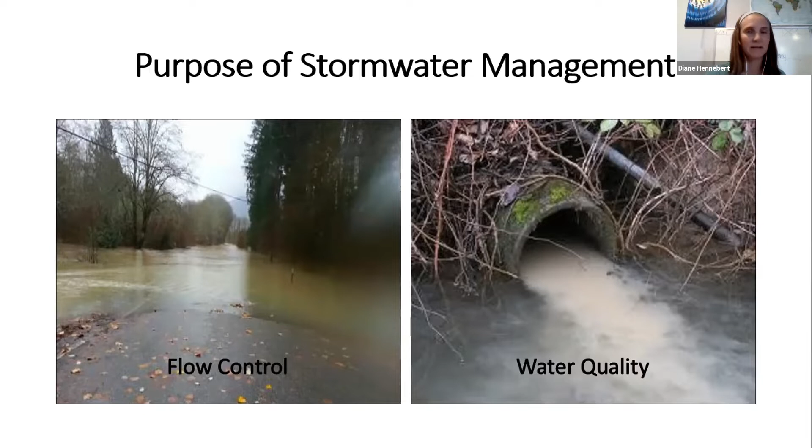A lot of these regulations come from the top. The Cuyahoga River caught on fire because it was so polluted, and that brought up a lot of public discussion and started the significant change that came with the Clean Water Act of 1972, as the government started to realize the importance of limiting dumping into our water bodies.

So the Clean Water Act came down through the EPA, and part of that was the National Pollutant Discharge Elimination System, which is kind of the second level down here, was part of that mandate. And here in Washington State, the NPDES program has been handed to the Department of Ecology for permitting. So they have a wide variety of permits where they limit what is released into our waterways.

Some of them in the private sector, like the industrial stormwater permit for industrial facilities, the boatyard permit, the sand and gravel, construction. And then there's also the utility-based permits. So the water treatment plant for Anacortes has its own NPDES permit, and so does our wastewater treatment plant. I'm here because my job is to oversee our municipal stormwater permit.

A lot of the local requirements that you have are a result of this NPDES program. We have requirements for our stormwater programs to ensure what's going in our neighborhoods is protecting water quality. And maintenance of privately owned stormwater facilities comes in, that bottom row is all of our minimum requirements for our permits, and it comes in under controlling runoff from developments and operations and maintenance.

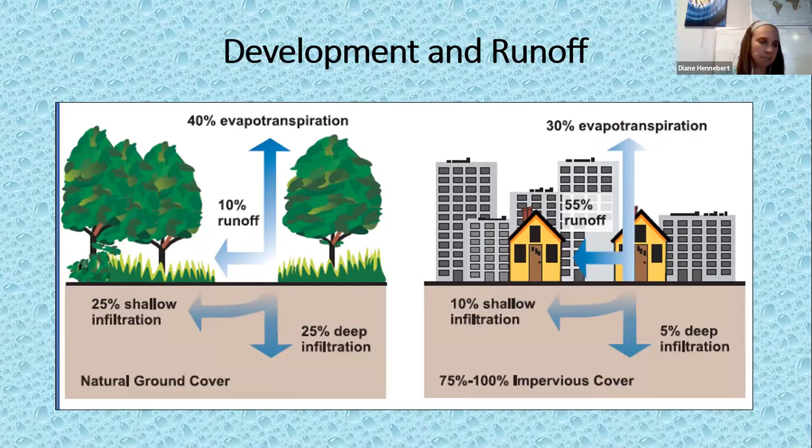So some of the basic components of a stormwater system I'll go over now, and then Reed will talk in a little bit more depth about these systems and how to maintain them. But your stormwater system, it starts with the downspouts from buildings and the catch basins in the street, and it ends in our local waterways. We have all these facilities to move the water, and sometimes it then goes through a stormwater facility along the way, like a detention pond or a vault or some kind of low impact development facility.

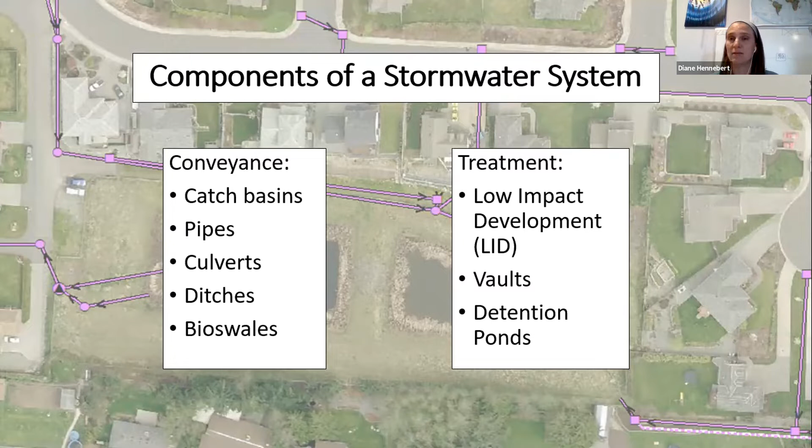So here's an aerial view of some of the typical stormwater facilities in Anacortes. This is part of our GIS mapping system. And you can see all of the little pink squares are catch basins in our roads. And then the purple lines are the pipes, and they usually have a directional arrow to show which way the water is flowing. So you can see where it collects on our roadways, and then a lot of it goes, the part that looks like a little tail is a bioswale, and I'll talk about those in a minute. And then the big part, big orange part, is a pond.

So the water goes into the stormwater pond, and then it collects out and runs to that blue line where it's discharged. And that blue line is the Ace of Hearts Creek. So everything that's coming off these roadways goes into Ace of Hearts Creek and then out to Fidalgo Bay. And that's why, in the stormwater world, we really try to emphasize only rain down the drain, because everything that goes into these catch basins is going to our waterways. It does not go to the wastewater treatment plant.

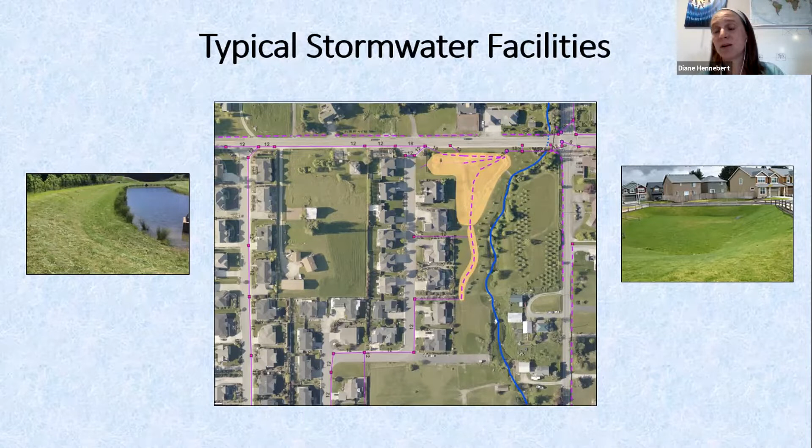So the first piece we'll talk about is a catch basin, or oftentimes called a storm drain. It's typically the first place that stormwater enters. It's an underground structure that collects the runoff off our roads and parking lots. And it allows the water to slow down a little bit, some of the dirt and sediment and trash to settle out. A well-maintained catch basin will help improve water quality.

Here in the drawing, we have what we call a type 1 catch basin. A type 2 is generally larger and circular, and we usually refer to those as manholes, but they function pretty much the same.

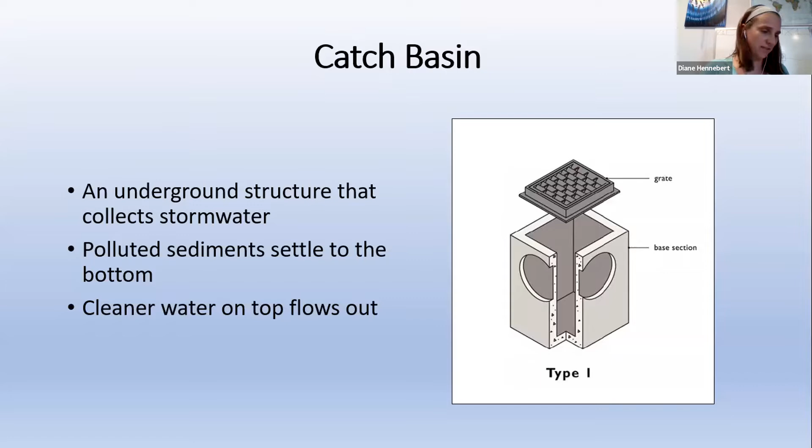So in neighborhood developments, stormwater often goes to a detention pond. They're engineered and constructed when the development is being built, and they're there due to the increase of the hard surfaces, the roofs, the roads, the sidewalks that are replacing the natural environment, and allow the greater development, allows them to capture the water and then slowly release it into the storm system.

In newer developments, often pond sizes are decreasing, not because there's less rainwater, but because there typically are a lot more low impact development features being put in overall, whether it's rain gardens for the houses, so everything that comes off the roof is being infiltrated on site instead of going to the storm pond, or permeable pavement. There are a lot of different options.

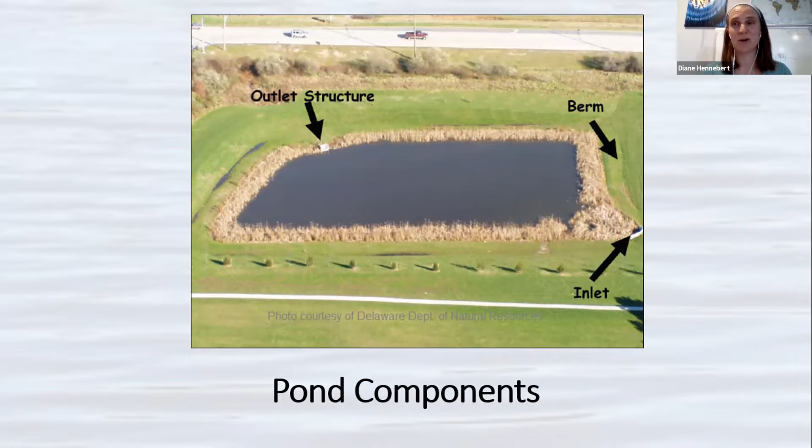So basic pond components, I'll go through and then talk about the difference between a wet pond and a dry pond. The big ones with the pond: the inlet where the water comes in, the outlet where the water goes out, and the berm, which is the wall that holds everything in place.

Wet ponds are designed to have water year round. They're usually lined with clay or plastic so that the water doesn't all infiltrate into the ground, and you can keep that year-round pool. They work because the water comes in and slows down, and the pollutants have a chance to settle out to the bottom. There can be some uptake by vegetation in and around the pond that will help capture some of that, and the rest resides in the sediments at the bottom. So periodically, you need to clean out the sediment out of the bottom of your pond to keep it functioning properly.

Dry ponds are not always recognizable as a stormwater facility. They usually just look like a big grassy field. They facilitate infiltration because they have no liner. So when the water comes in, it has a chance to soak into the ground. And a well-maintained pond typically should dry out within a week of a rain event. Now here in Western Washington, we get rain from early November until May, sometimes continuously. So it is possible to have a dry pond that spends a significant amount of the year with water in it. That does not necessarily mean that it's failing.

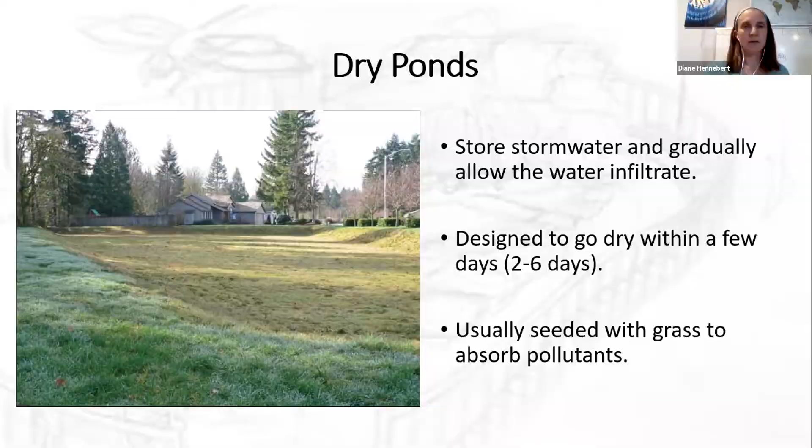So with your inlet and outlet pipes, they often have trash racks, which are the bars that you see in the picture here. The trash rack keeps debris and animals and children out of the storm pipes. And underneath the inlets, there's often riprap, which are those big rocky pieces underneath, usually about 12 inches in diameter. And those act as a splash pad to prevent erosion. So when the water comes pouring in during heavy rains, it's not sloughing away the soil, but the rocks can absorb that energy.

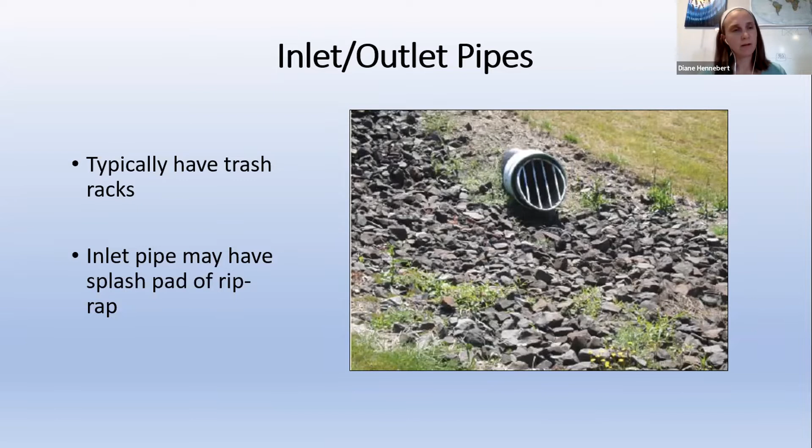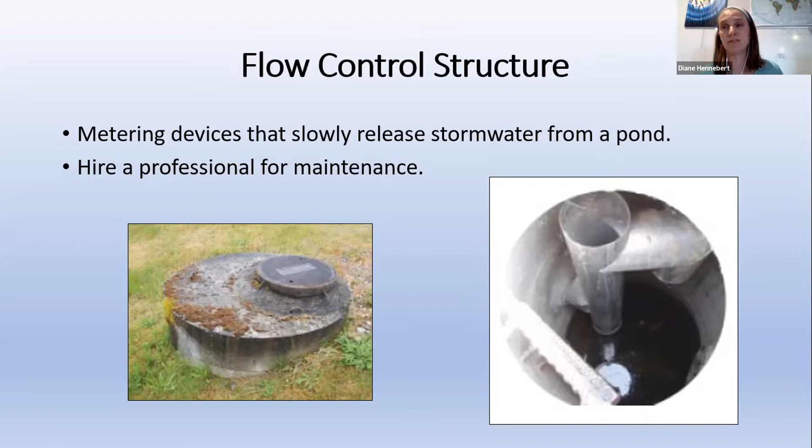Control spaces or control structures are confined spaces. So if you need to do some kind of maintenance to your control structure, you have to have someone who is confined space certified and trained for these kinds of repair and maintenance. I know the ladder may look really easy just to climb down in and take a look, but confined spaces can be deadly, and it's really, really important that you have someone with that certification going in there.

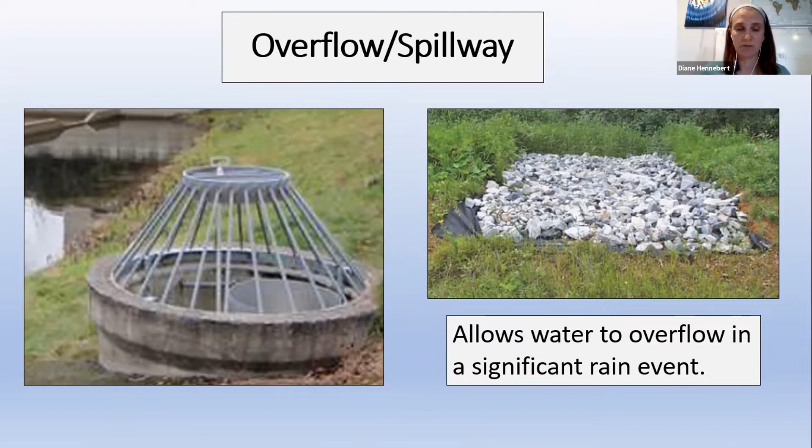And then there's the overflow and spillway. So this allows excess water to leave if, during a really heavy rainstorm, the pond gets full up to the brim. Sometimes it's a small cut on the top of the berm that's filled with riprap, like on the right, that allows water to spill out without eroding away the berm. And sometimes it's a beehive structure, like on the left, that can move water out of the pond really quickly to prevent overtopping.

Now, sometimes you want to keep an eye on these because sometimes rocks will come out of place, whether it be from erosion or local children. If I had something like this in my neighborhood growing up, I would have had a heyday building all kinds of new structures with it. So you do want to keep an eye and put them back together if they come apart.

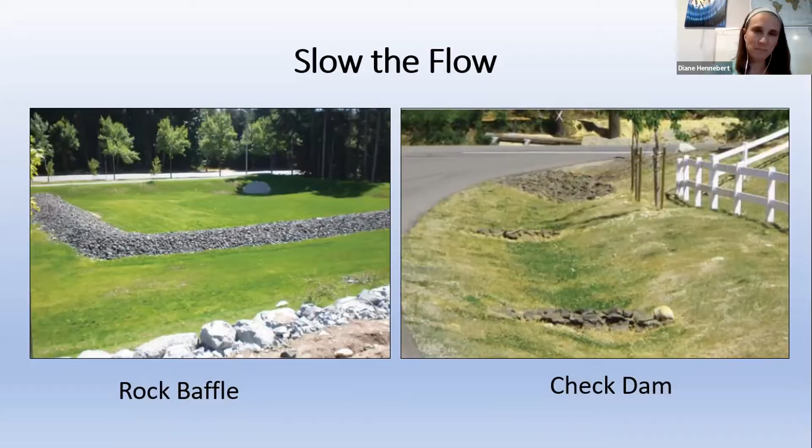And then there's berms and dams. The berms are the earthen walls of the stormwater pond, and they determine the capacity of the pond to hold water. And if an earthen wall is not possible for some reason, then sometimes concrete walls will be used for the perimeter of the pond. And a really important thing to note about your pond is that if your pond is above ground, not sunk down below the general elevation of the neighborhood, it's extra important to keep a close eye on the berms to make sure that you don't wind up flooding your neighborhood.

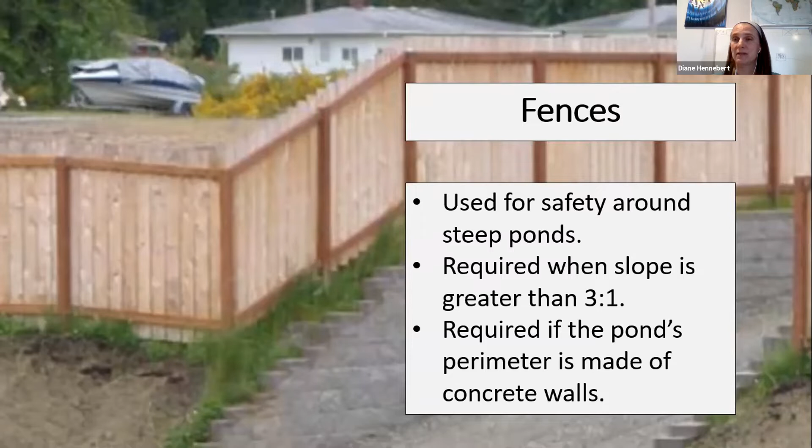And then fences. Most engineering standards require that stormwater ponds with steep slopes have a fence for public safety. Generally, if the slope is greater than 3:1, or if the perimeter is made of concrete walls, then you'll be required to have a fence around it and keep that fence in place.

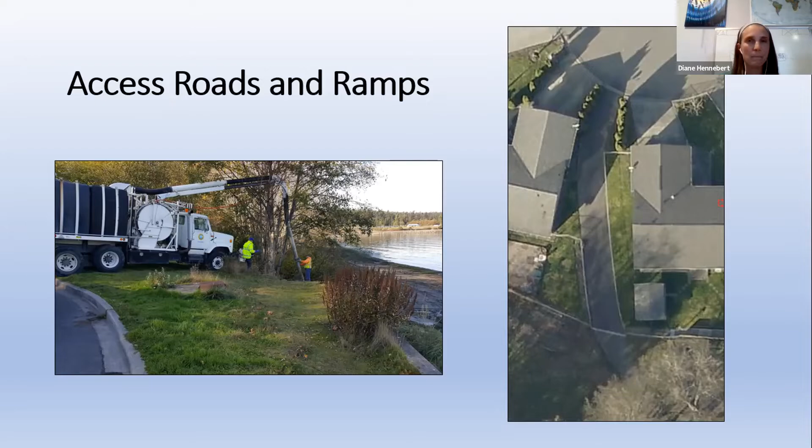So we've talked a lot about ponds, but bioswales are also really common in neighborhoods and commercial developments. They're wide, shallow, vegetated channels with really gentle slopes and flat bottoms. So you look at it and it looks like a grassy ditch, and to a degree, it's actually a fancy engineered grassy ditch. They usually have a real gentle slope so that the water goes really slowly. The grass is a really important piece. It helps to filter out pollution and suck up water for photosynthesis.

If it's designed properly and maintained, it can go a long ways to infiltrating and cleaning stormwater as it slowly makes its way through. And they can be anywhere in the stormwater system. You often see them alongside roads. They're really effective with capturing road runoff, but they can pop up all over the place.

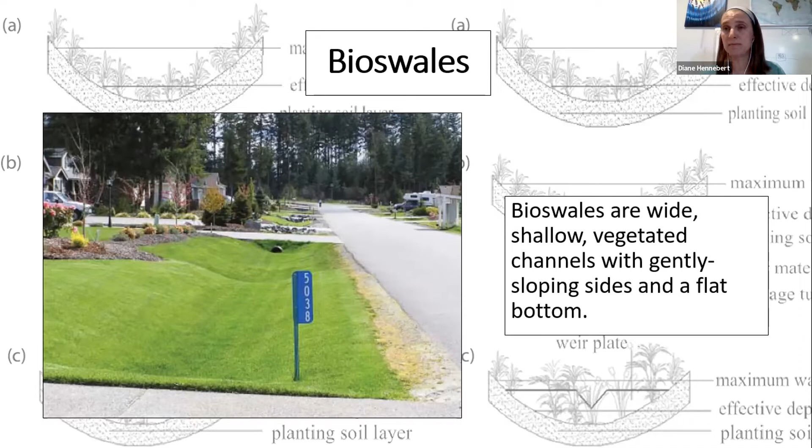Now, modifying swales can really reduce their ability to slow and treat rainwater, which then ultimately contributes to flooding. It might be tempting to fill it in and cover it up with rock for a parking pad like some other neighborhoods had, but then you lose all of that capacity for stormwater and all of that treatment. And the neighborhoods that have those gravel parking pads were probably permitted and built before your jurisdiction had an NPDES permit. And that's why they got away with it.

So the first thing you need to do is know your specific facility. Each pond is different depending on the location and the design and how much area it's draining. Most ponds are going to have the features that I've mentioned previously. Usually the developer will pass the plan sets on to the HOA, so you may already have those plans in your possession. If you don't have them, a combination of a little research and a little field work can be really helpful in determining what components you have and what you're responsible for maintaining. Or you can always hire a contractor to come in and figure it out and set up your maintenance plan for you.

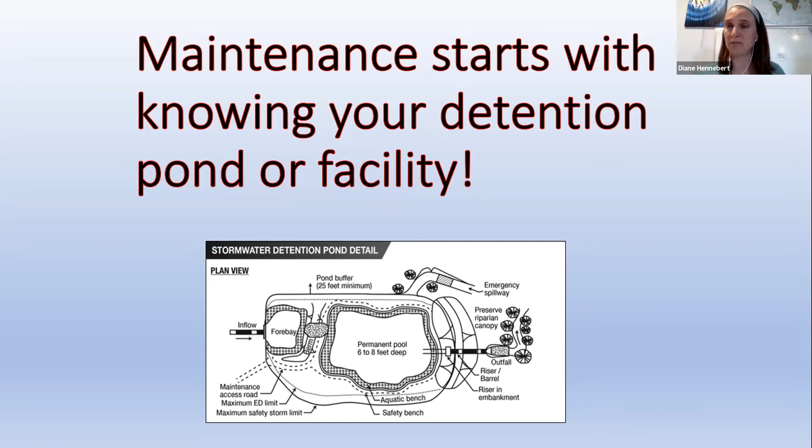So if you're looking for records, if you don't already have them in your possession from the developer, you can find different information in different places. Plat map for the area will generally tell you who's responsible for the facility, whether it's being signed over to the HOA or if the city has ownership or maintenance requirements for it. And that will always be site specific.

And then construction drawings will be useful for your pond specs for the elevation depth, the capacity, where the control structure is, what size the orifice is, all the things that you need to know to restore your pond. And an operations and maintenance guide is really helpful. The recommended maintenance is often included in the CC&Rs, but not always. And also you want to know about easements, which are usually on the plat map, but sometimes it's just a written description and some paperwork somewhere. That's really helpful for accessing your pond.

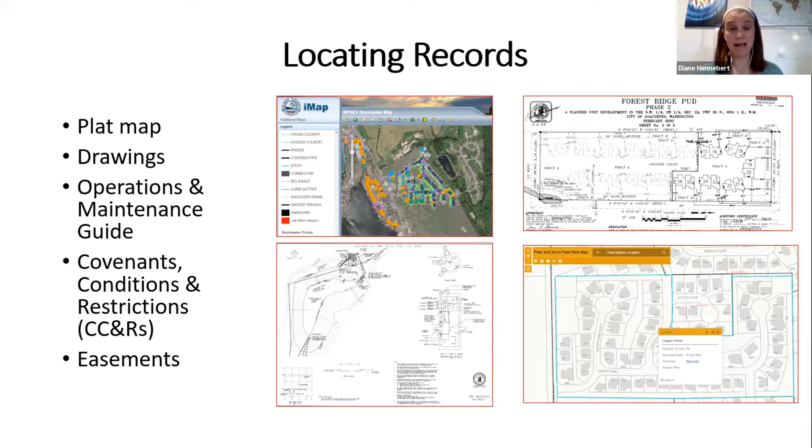So where do you find all of these documents? A great resource is the Skagit County IMAP. You can click on the parcel in IMAP, and then once you open up the parcel, you can click on Assessor Property Details. And then under the recorded documents, you can find all the recorded documents, which would include the plat map and easements and things along those lines. Or if you see an auditor's file number on something, you can go to the auditor's website and look up that file directly.

If you're having trouble with that, go into City Hall. I know Anacortes and I think most of the other jurisdictions we have on our website, you can access a lot of these records through our interactive map. But if you're having trouble, go in, they'll know what to look for and where to look for it and are happy to help you out, especially if you're interested in performing maintenance on your stormwater facilities.

Another useful thing is aerial photos. They don't always line up perfectly. So if you're using like the distance measurements on it, it may or may not line up quite right. It's not a substitute for a professional survey, but it can be really helpful to look at the aerial, especially if you have your site plans with you, because then you can see maybe where a catch basin might just have plants overgrowing it, and that's why you can't find it, or what might be going on with your facility. So those can be really helpful also.

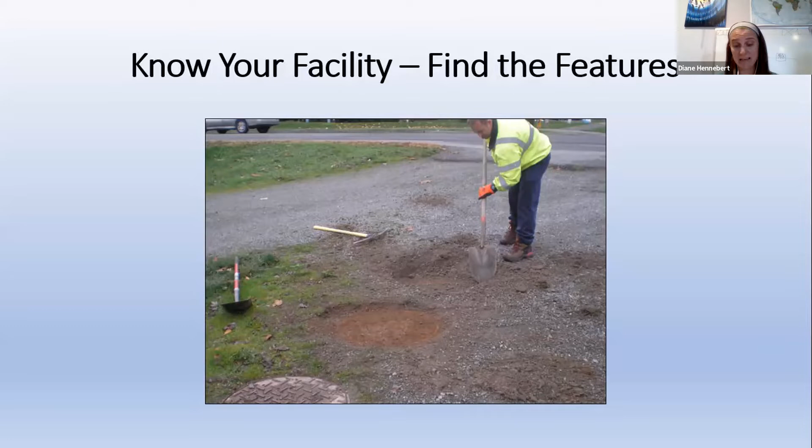I had one site that I was inspecting. It was a commercial facility outside of Skagit County, and the landscapers had been trimming the ivy really beautiful over their big, tall manhole. And so at first I couldn't find it, and I finally figured out it was hiding under this ivy, and we just actually needed to weed whack it all down to actually find it instead of turning it into yard art. And a metal detector can be handy for finding lids if you're really having a tough time.

So keeping an eye on your facility is a really great way to learn about it. Get a baseline during dry weather. What does it look like when it's been dry for a while? When we get a good rainstorm coming in, how fast does your pond fill up? The water that's coming in, what does it look like? Is it clear? Is it pretty murky looking? What kinds of things are you seeing floating in there? And then after the rainstorm ends, keep an eye on it.

How quickly do the pond levels drop? Is it flowing out at a normal rate? If it doesn't seem to be dropping at all, is there something blocking the outlet that's preventing the water from leaving? Or sometimes you get things blocking the orifice in the control structure that, again, will stop the water from leaving the pond. And so keeping an eye on it throughout the year will really give you an idea of when things start to change, or when a problem arises, you'll recognize that this is not how it's normally functioning during storms.

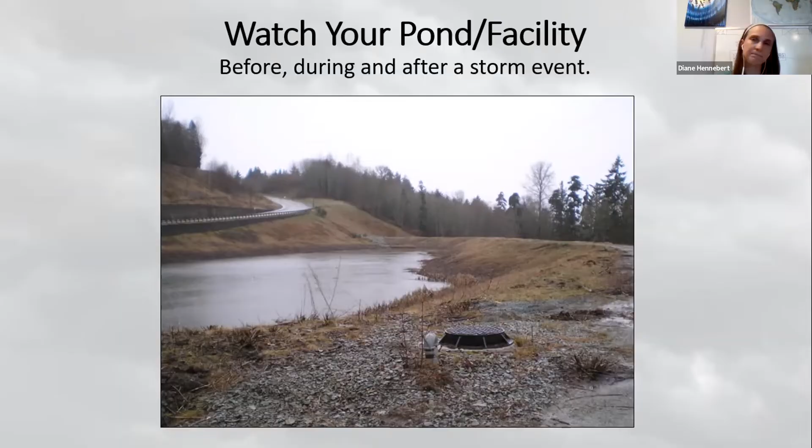So what if you don't have an operations and maintenance plan? There's nothing in the CC&Rs, you haven't found anything in any of the paperwork. You can look at the Department of Ecology's Stormwater Management Manual for Western Washington. Volume 5, Appendix 5A has maintenance standards. This was updated in 2019. If going through and trying to find that is frustrating, please give your local stormwater department a call, because I promise you, myself and all of my counterparts, we know exactly where to find these things, and we would be happy to send you a link just to that exact section that you need.

You can also hire people. There are a lot of contractors out there that are really knowledgeable and can help you, can come out and take a look at your site and tell you what you need to do and get you on a regular maintenance schedule.

If you do all these things, keep an eye on your pond, regularly inspect it, do maintenance, it can save you a lot of money in the long run. And I'll show you a couple of reasons why.

Trees. Mowing 1, 2, 3 times a year will keep your vegetation at an acceptable level and keeps trees from taking root in your berm, on your pond bottom. Alders and cottonwoods love the moist soils in our ponds, and they grow fast. They can reach 65 feet tall in 20 years, and then they break over. They're falling on people's fences. They're taking up capacity in your pond. And a tree clearing project is much more expensive than mowing once or twice a year to keep those little saplings down.

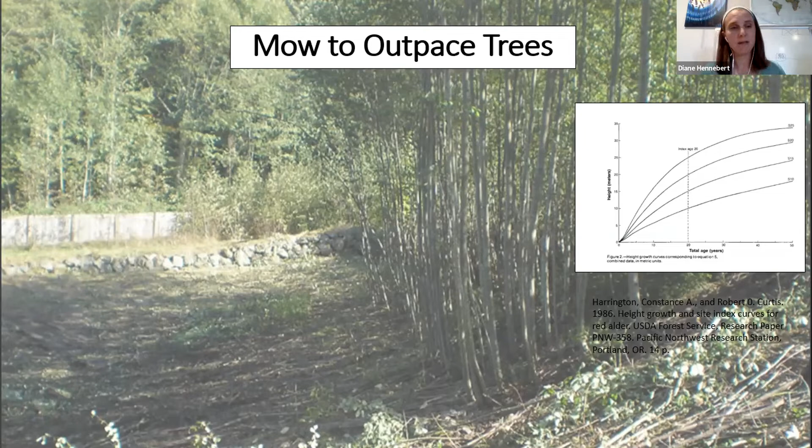So now not only do you have to come in and get out those trees, but you also have to reconstruct the berm to maintain the structural integrity. So coming through with loppers and a weed whacker, you know, once, twice a year, get the big woody things out, can really save you a lot of money in the long run.

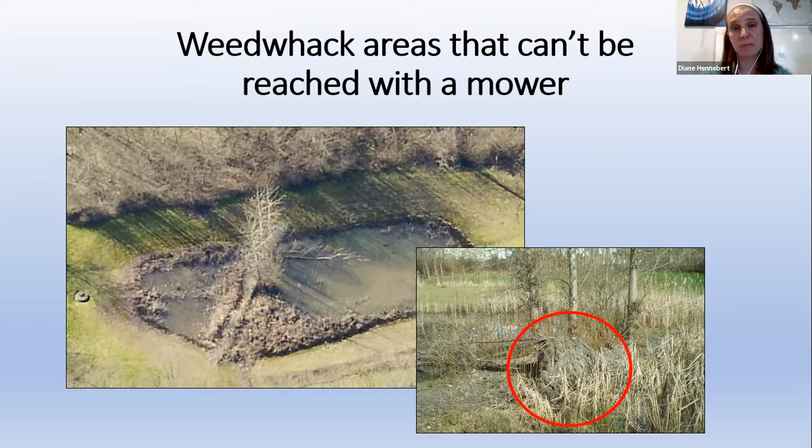Another thing we get a lot of questions about in the stormwater world are mosquitoes. They're a nuisance and a disease vector, but ponds and swales aren't a likely source. Dry ponds should be dry during the summer. Wet ponds should be deep enough that the mosquitoes don't like them. They like shallower water. Catch basins sometimes can harbor mosquito larvae, and some municipalities do treat their catch basins. But if you want treatment to go on in your stormwater facilities, you do need someone with a pesticide license to apply the pesticides.

If you're seeing a lot of problems with mosquitoes, the first thing you should check are kiddie pools, buckets, gutters of houses. Those are the first places that mosquitoes are going to go for.

And our last big item is reporting spills, anything you see in your storm system. Stormwater flows to our nearest water bodies, whether it's the Skagit River or creeks that feed to the Skagit River and then into the Salish Sea. And usually there's no treatment before it hits these waterways. So if you see something, say something. When I finish my presentation, I will put the spill hotline numbers for each jurisdiction in the chat box.

Even if you're not sure, go ahead and give us a call. We'd love to come out and take a look, because if there's a problem, we really want to take care of it before it hits the waterways. And if you think it might be something hazardous, call 911. And if it's after hours, you can call 911. The dispatchers are trained for who they need to call within our public works department in an after hours or a weekend situation.

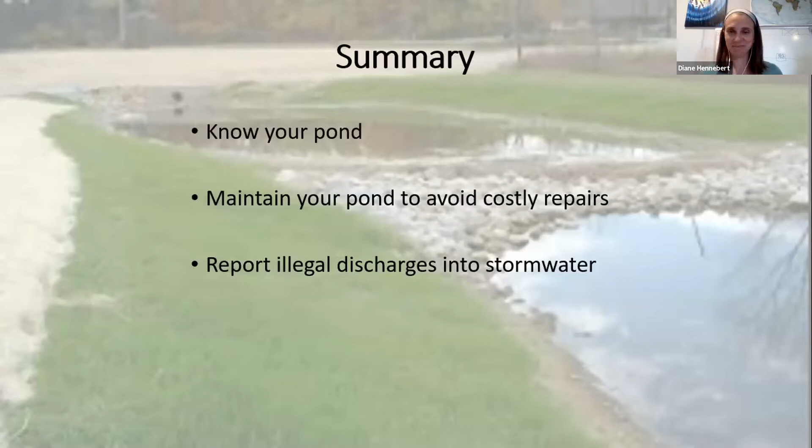So that wraps up my part of the conversation. Reid will get into the details of some of this maintenance, but if you have any questions, now's a great time to throw them out.

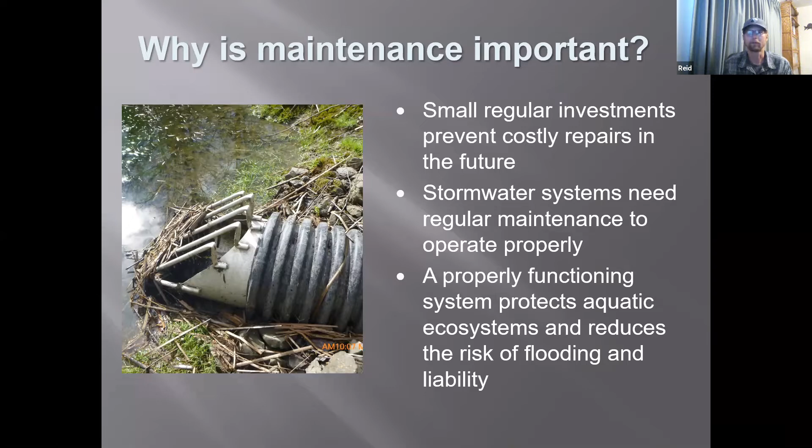A properly functioning system is going to protect aquatic ecosystems, and as we've discussed, we want to really eliminate that flooding and any potential liability that could come with it, because we've removed all the pervious surfaces, and these impervious surfaces have now required the need for these systems.

What are the first steps? You want to find out what you own, get familiar with your system, what you're required to do, and get out there and assess what kind of condition it's in.

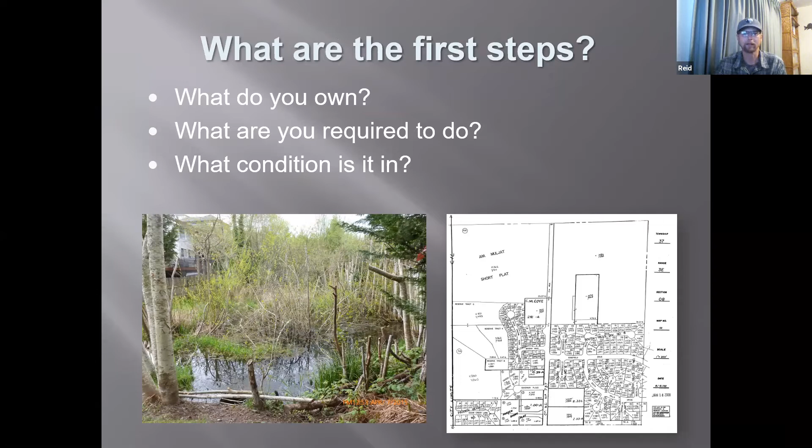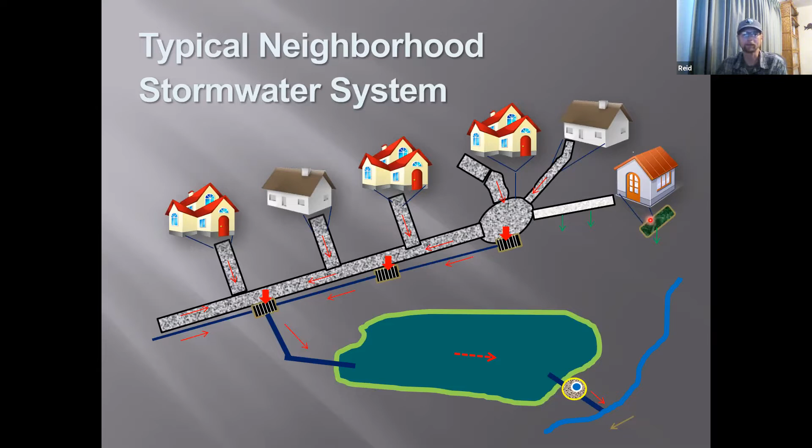So here, this would be an example of permeable pavement. The water will actually just trickle right down through the pavement and then into the ground, back into the groundwater. This would be like your downspout connected to a rain garden or a bioswale. Both are stormwater features that can allow water to infiltrate back into the ground rather than continue over the surface.

What are you required to do and when? You're going to have some different requirements depending on what city you're in, or if you're in an urban growth area. Diane gave you a lot of good resources, who to reach out to in your particular area and get the lowdown.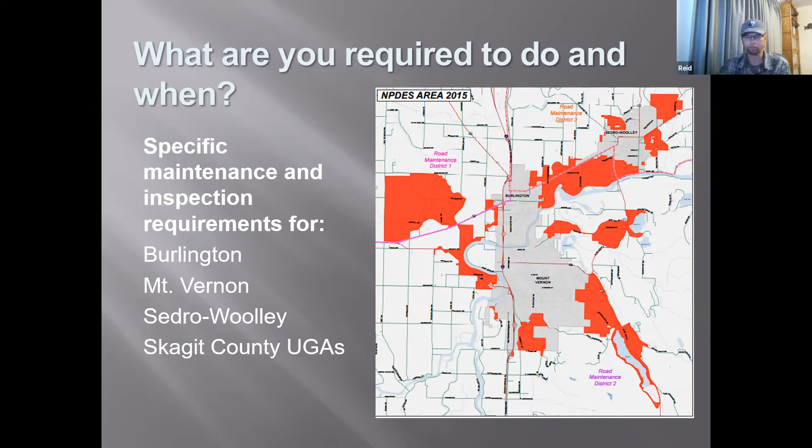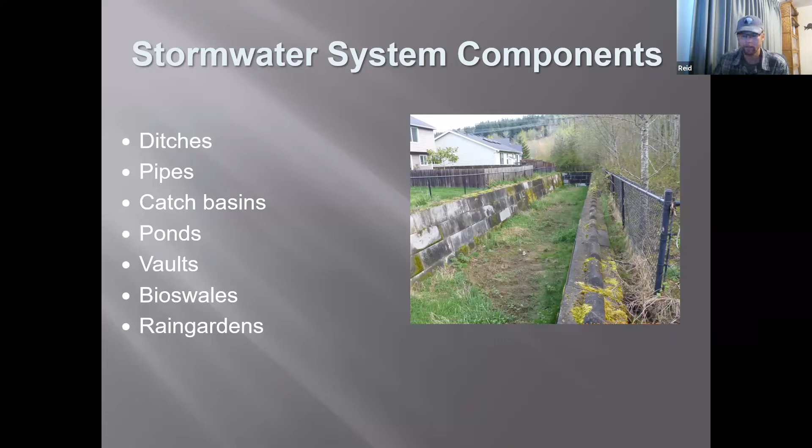Okay, so starting off with ditches, you want to inspect these monthly and after large storms. The main things, as Diane mentioned, there are these check dams to slow the flow of water. You want to check for sediment behind those, remove it if it's building up, and keep the structure in place.

You want to look at the vegetation growing in the ditch. You don't want any trees or shrubs in the flow path, and you don't want to leave any of the vegetation you cut in the ditch. You want to remove everything. Keep an eye out for yard waste dumping, and also as the vegetation dies back before winter, it's a good opportunity to go in and clear that out so that it doesn't just contribute to clogging downstream.

Another thing to look for is the structure of the ditch. Pay attention to any scouring or slumping, any erosion that you see going on. As far as your ditches, who's going to be maintaining these? If it's on a private road, that's going to be the owner's responsibility. And typically your ditches and catch basins that you have in the roads in a city are going to be maintained by the city.

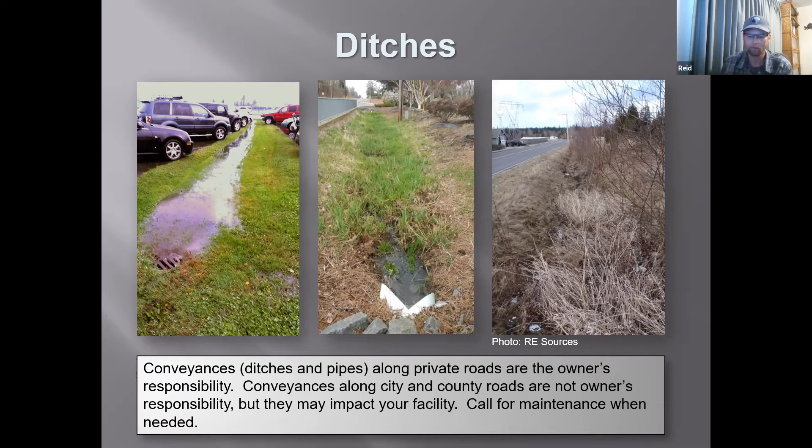And next we'll talk about pipes. You want to inspect these monthly and after large storm events, just like ditches. Most stormwater facilities use pipes to convey water underground, and you see culverts to get water under roads and driveways. And then typically these pipes are connecting catch basins throughout the system and then conveying that to a pond at the end.

Even though the pipes are underground, it's important to know approximately where they're located, and you want to regularly check that they're not getting filled with sediment. There's the standard of having the sediment removed if it's exceeding 20% of the diameter of the pipe. You'll want to walk around your property, preferably when there's flowing water. That helps locate these things.

And let's see here. You want to take a look at the inlets and outlets where these pipes either enter the storm system or come into a catch basin. Look for any erosion. Sometimes roots from trees could be growing in, causing some clogging. And if you see any damage to the pipe, sometimes they kind of bent in, or the volume of the pipe has been compromised, you'll want to try to bend that back or fix that issue.

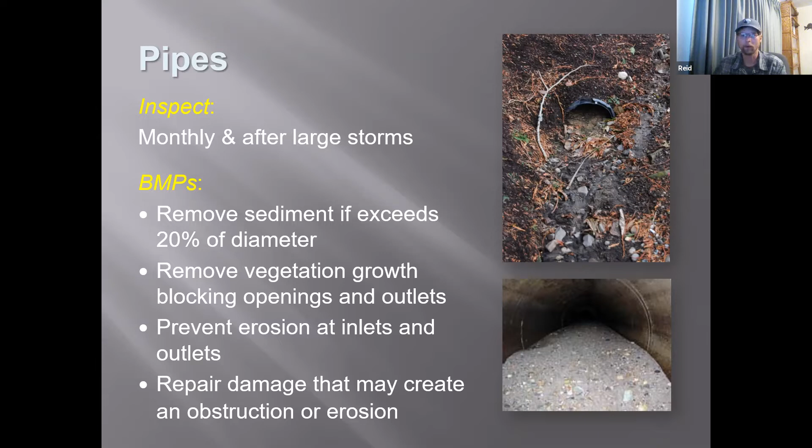We'll move on to the type 1 catch basins. These are the smaller catch basins. You'll want to check these monthly, and after storms it's always good to check that grate. A lot of times in the fall, when the wind's blowing and the rain's coming at the same time, you have these grates get clogged up. So it's a good thing when you're out walking the dog to clear those off and keep any water from getting backed up.

Annually, you'll want to check the interior to look for sediment. With type 1 catch basins, the standard you're looking for is you don't want the sediment to be more than 60% of the sump depth, or within 6 inches of the invert clearance. So in our example here, you can see this is the outlet pipe, and the bottom of it is what we call the invert. From there to the bottom of the sump, or the bottom of the catch basin, is what we call the sump area. So when this area is 60% filled with sediment, that's when you know it's time to consider cleaning it out.

When you're assessing these, there are some precautions you want to take. The lids are heavy, and a round lid won't go down the hole, but if you have a square lid, you want to have a really good grip on it and make sure it's not going to fall down the hole when you try to remove it. Sometimes you'll need a shovel to remove grass around the perimeter of the grate before you can pull it up, or sometimes a sledgehammer is useful to break loose some of the rust that forms around the seam. Another thing to do as you're looking down the catch basin is to look at the grouting, make sure it's all intact and there's no cracking going on.

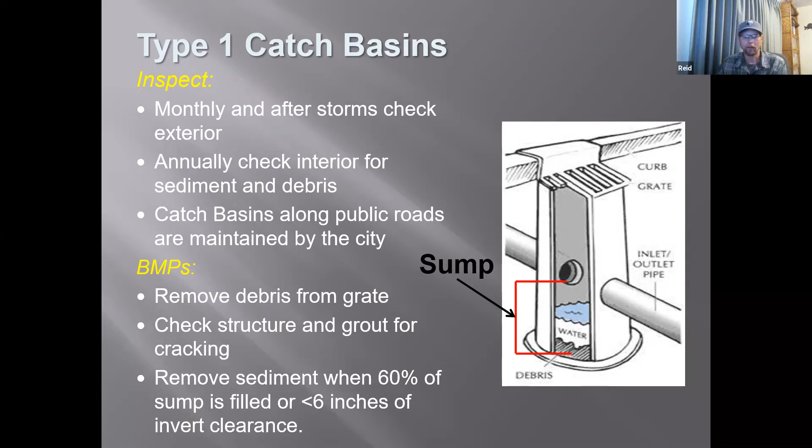And the type 2 catch basin serves a similar purpose, taking the stormwater and giving it a spot to settle, and then water is going to come off the outlet. These are much larger, so we're talking about confined spaces. Again, no one should enter a confined space without proper training because of the toxic gas hazard. Every year you hear sad reports about someone who thought they could just make a quick little change, but when they get down there, they're overwhelmed and can't crawl back out.

You want to check your type 2 catch basins, same as type 1s, annually and after large storms. The standard on how full of sediment these larger basins are is slightly different. We're looking at 1/3 rather than that 60%. And rather than 6 inches to the invert, we want to have 12 inches to the invert.

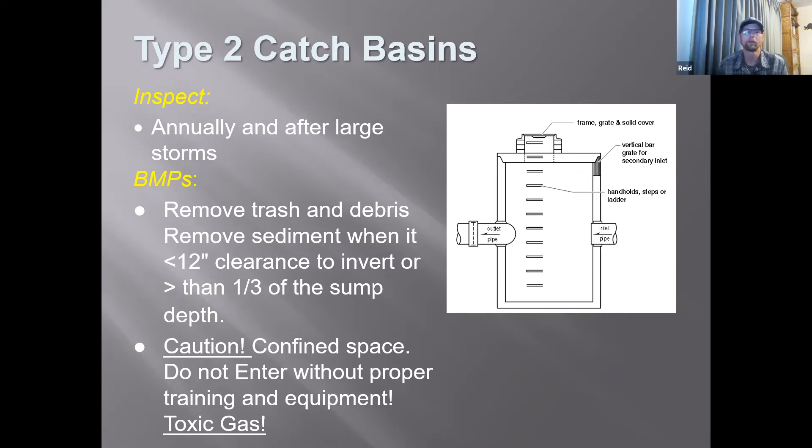Here's a couple of examples of the catch basin being cleaned. This would be a Vactor truck, and they can bring this hose, stretch it out to the basin, and suck out all the debris. When you call out the Vactor truck to clean basins in your neighborhood, you'll want to talk to them about which ones you want done and make a plan. The best way to do that is checking your sediment depth.

If you get a probe, we typically use a chimney sweep rod. You can also use an avalanche probe; I think you can pick those up at REI or sporting goods stores. You probe down and can check how deep the sediment is. Once you've determined which ones need cleaning, you can schedule the Vactor truck to come out and get the ones that need it, and avoid having them spend any time on ones that are already clean.

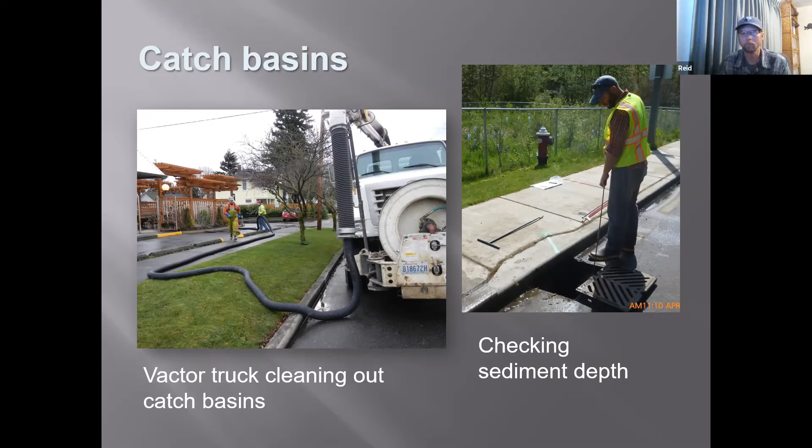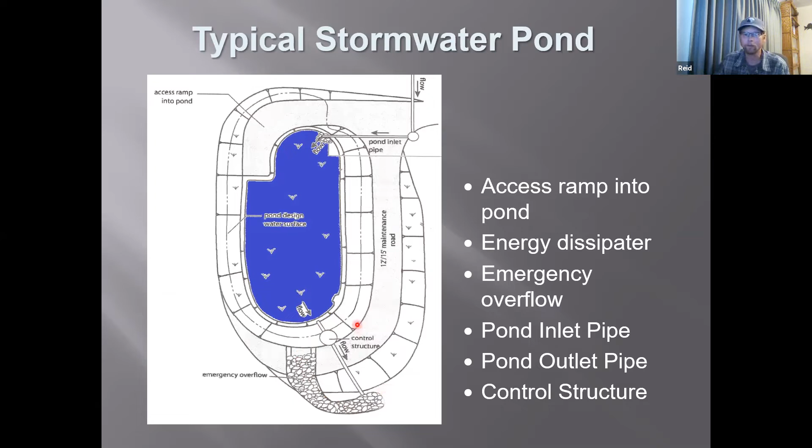So talk a little bit about trees and the perimeter of your stormwater pond. The trees are often planted for aesthetics and stabilization, temperature control reasons, but they have to be managed to prevent problems. The trees could clog pipes. You could have structural failure of the berm if the tree were to blow down, or if the tree dies, then the roots die back, and that can actually cause what we call piping, where it creates a place for water to flow. Then you also have to consider the leaf litter input of deciduous trees. Every year, they're just adding more leaves to your pond if they're hanging over. Like David was mentioning, that big leaf maple in his pond that contributes.

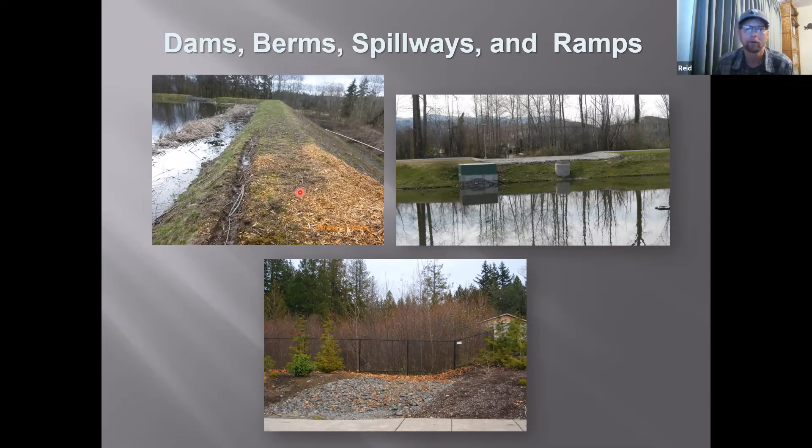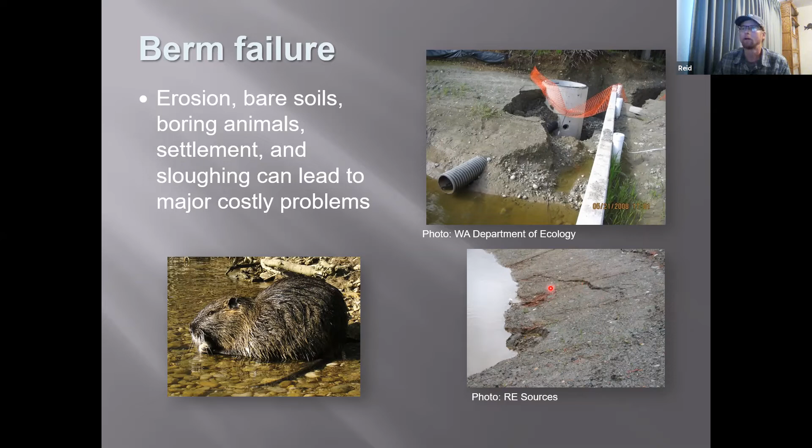Trees versus grass around the berm. We talked about how there are some nice features with trees, but you really just need to be cautious about where you put them, and make sure you consider access, visibility, shading, being able to inspect the sides of the berm, and then leaf and debris management. So oftentimes grass is the best for your berm, and a few small trees that aren't going to be in a place where they could blow down or cause any issues could be okay. Just have to have the right considerations.

Dams, berms, and spillways should all be inspected quarterly and after major storms. And keep in mind controlling vegetation, repairing erosion, looking for any structural problems. If that slumping or settling is over 4 inches, you should consult with an engineer, and then protect that overflow. Keep it well armored from erosion, and don't let trees or vegetation grow in that water path. And be on the lookout for burrowing animals.

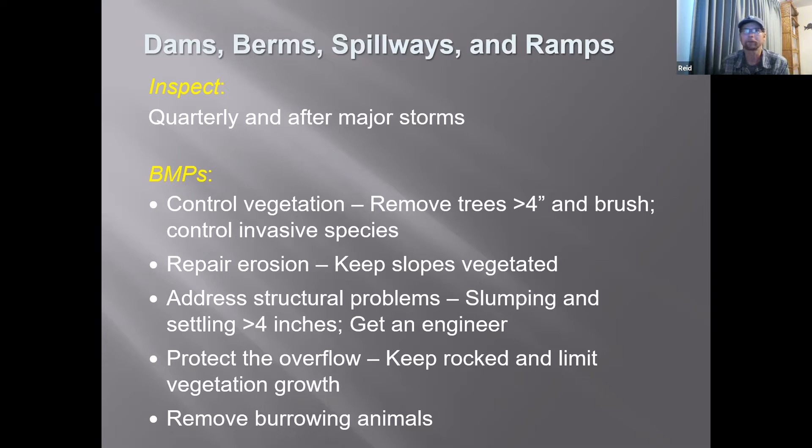Your inlets and outlets of the pond, you've got to keep an eye out on these, especially the outlet during large storms. Make sure you're not getting a large buildup on the trash rack, and the water level starting to rise on you.

Find your inlets and outlets by walking around the pond, and it's usually a good idea if you can to get a fence post and mark these areas around your pond so that they're easy to find. At high water levels, it might be completely submerged, and if you have that fence post there, you'll be able to know where to look. Make sure to always keep an eye out for any erosion. You just want to make sure none of that soil is ending up in your pond, because then it becomes sediment that you'll have to remove later.

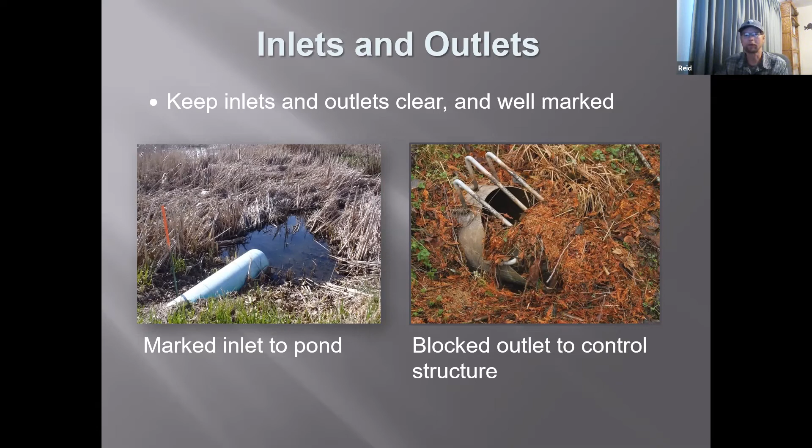On the pond bottom, you want to inspect annually, and the dry season is the best time to do this. But also after major storms, just get a look at those inlets and outlets, make sure the water levels look as expected.

Other things to look for in your pond bottom: if you have cattails that are covering more than 25 to 50% of the pond bottom, that's usually an indicator that your pond's starting to fill with sediment. The recommendation is to have sediment removed once it's over a foot, and that's kind of like a foot throughout. Oftentimes your sediment mostly accumulates right at your inlets, but all ponds are different.

And sometimes you can get away with just removing a plume of sediment that's formed right at the inlet, and the rest of the pond has not taken on so much sediment. But each pond's a little bit different depending on how it's designed. You'll want to get any trees and woody vegetation out of the pond bottom. That just adds to your sediment and leaf litter every year.

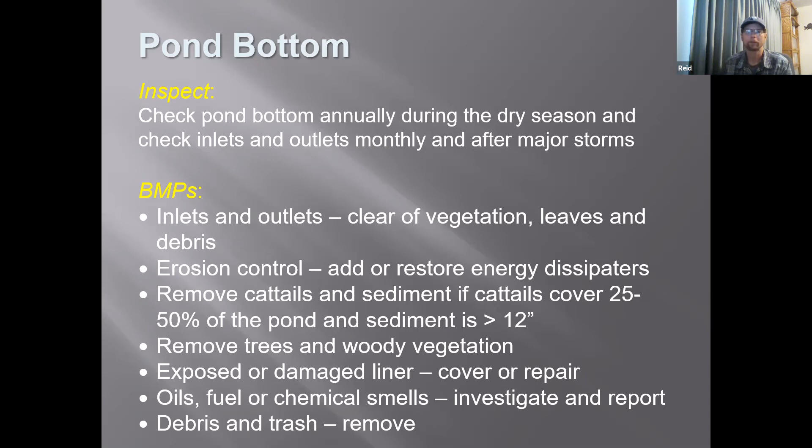I was telling him we might have the record for the county. I don't know, this was in Whatcom County, but

I don't know if any of your ponds look like that, but that is a pond that would need to be considered for dredging, removing that sediment. They build up organic matter every year and grow up and then die back.

Couple options depending on how extensive your cattail growth is. If it's not too bad, you may be able to cut and remove them annually to try to have some control. Whatever you remove from the pond is going to be sediment that you don't have to remove later. So it might be easier. You can get it out while it's still in cattail form.

And also, if you do end up dredging, then you're just going to remove them that way. Or you're just grubbing them out when they're growing in the spring. But I don't think David's going to be grubbing that patch out over there.

And I think, Reid, we can point out that the taller the cattail, the deeper the sediment is likely to be in your pond. That's just a rough approximation. So this has about 18 inches of sediment in it, which we will hopefully get out this summer. Yeah, that's a good indicator.

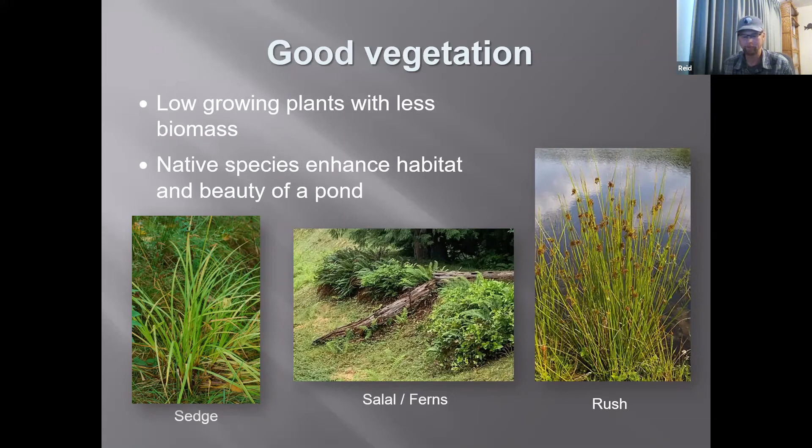So moving on to the control structure. Diane gave you guys a little overview, but we'll go into a little bit more of the details of how it works and what to look for.

in case there's an emergency. If there ever was an emergency, you'd already want to be talking with the city, whoever's the agency for your pond, or government that's in charge of your pond. Tell them you're having a problem and that maybe the solution is going to be to let some water get out of the pond. And this is one way to do it.

Also used for when you need to drain the pond to do a dredging or cleaning, but they tend to get frozen up. So you just give it a quick yank, make sure it'll release, and then let it back down.

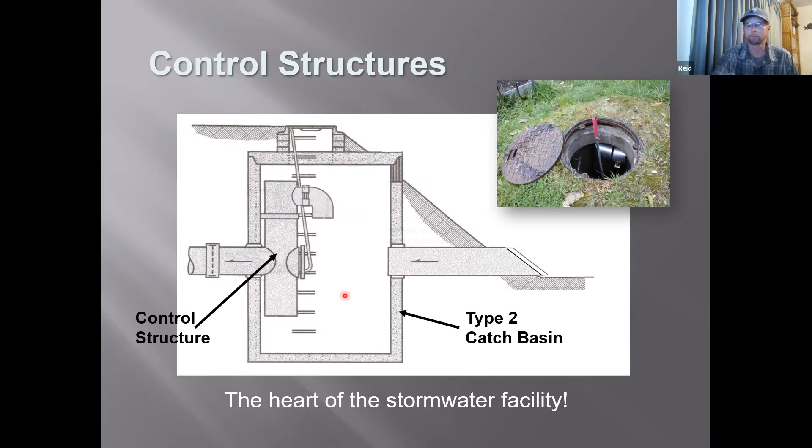Here's a couple more pictures. And as the water goes up, it reaches different orifices. So if there's a big rain event, as the water rises, it'll start to dump more water out of larger orifices until at the top of the standpipe, usually it will just pour right over the top to the outlet.

In this photo here, this is actually a little extra inspection plate, and that would be just because since the standpipe's kind of offset, opening that would allow you to put a probe down there and check the orifice plate, make sure there's nothing clogging it. Sometimes you can just poke your chimney sweeping rod or probe down that hole, and you can poke it down through the orifice. That would help to clear it out.

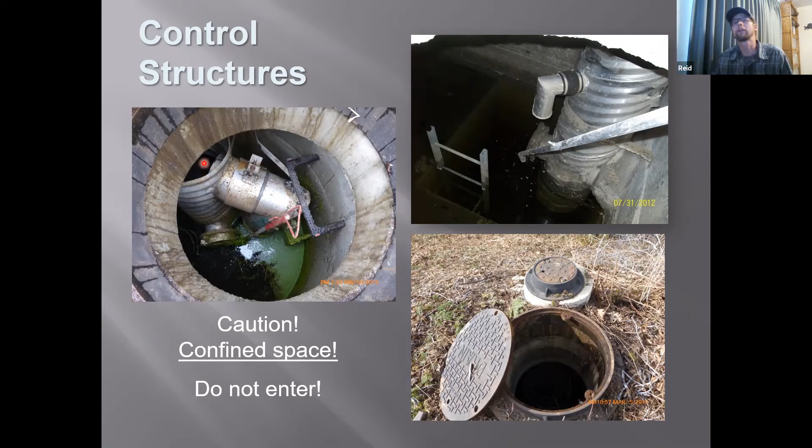Other times it's kind of obstructed by the rim of the manhole, and you have to be a bit more creative, but don't crawl down there.

This is a good example of how this works as the water level rises. So I'll try to go through it pretty quick. So prior to the rain event, everything's dry. As it starts to rain, our catch basin's filling up, and then we have water starting to travel through that orifice out the outlet.

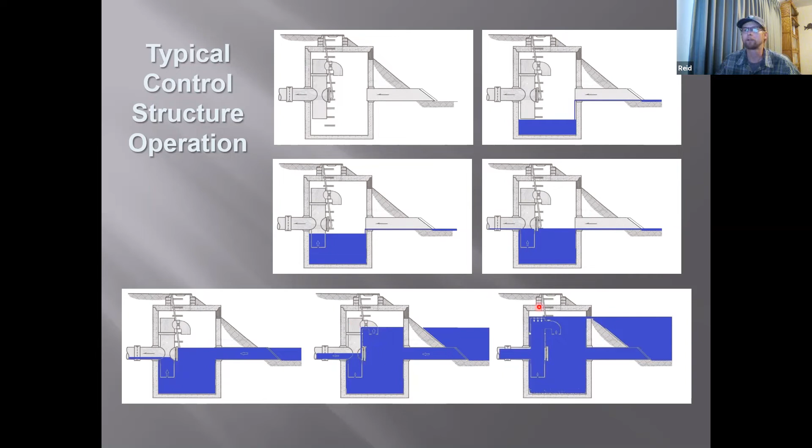This is a typical kind of smaller rain event, and then if it keeps on raining, it's going to overwhelm the orifice plate. Then it's going to come through this overflow orifice, and then eventually we're just dumping right down the top of the standpipe.

So inspect your control structure annually and after large storms. And this is one where it's really good to keep an eye on those pond levels, because after a storm it's pretty easy to tell if the pond's higher than normal, and most likely you're going to be dealing with some issue at your control structure or at the outlet. Maybe the trash rack's clogged leading to the control structure.

The maintenance practices for your control structure: check the ring and cover, make sure the grouting is intact. Sometimes those rings kind of move around over the top of the manhole. So anchor them down with some grout.

Just like we discussed with the type 2s that the control structure is housed in, you want to check for sediment when it reaches 1/3 of the sump depth. That should be removed, or within 12 inches of that orifice plate. And also keep an eye out for any debris and trash, get that out.

And then, as we discussed, checking that shear gate, and when there hasn't been a storm for a while, you'd expect the water level should be right about the bottom of that shear gate opening. That would be your typical pond level. If you're seeing something else, it could be that the orifice is clogged or something else is going on.

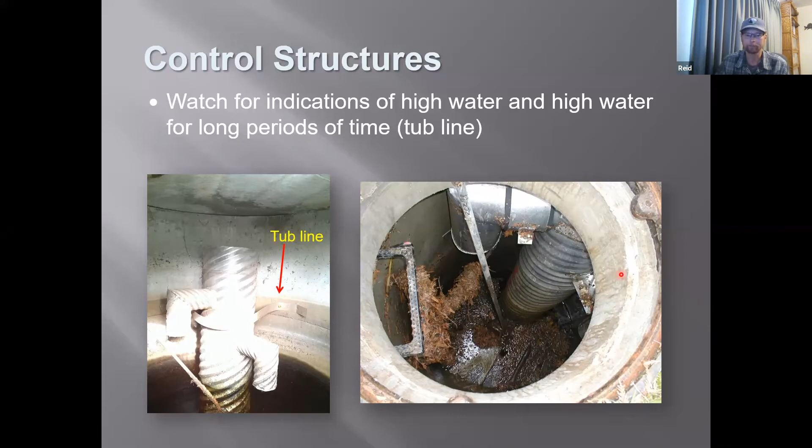Moving on to vaults. This one kind of serves the same purpose as a pond, only you could make a parking lot over the top of it rather than setting aside a lot of land to have a pond feature. So all underground, but has manhole access, again, confined space. So no business being down there without training.

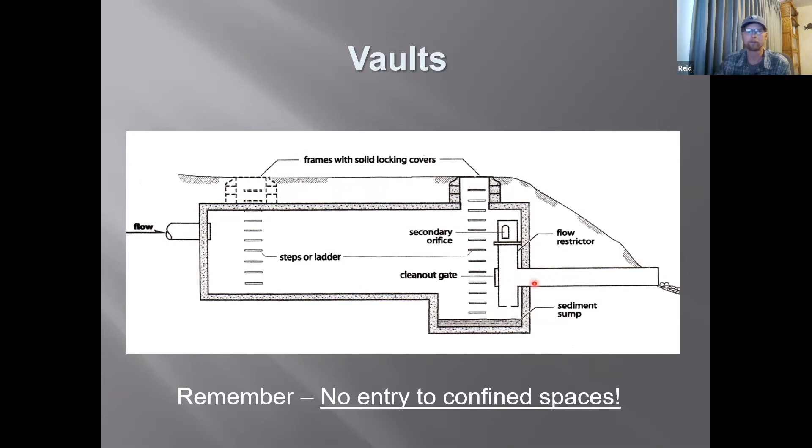And then we have a control structure, just like you'd have housed in a type 2 on a pond, and all of those same considerations for maintenance. Checking it annually and after major storms. And you have the shear gate, just like on the pond control structure, all the same considerations.

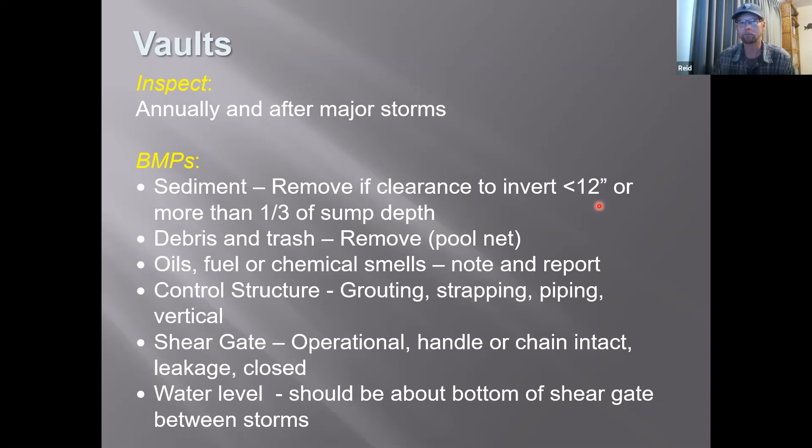For bioswales, we want to inspect quarterly and after large storms. Mostly vegetation management in a bioswale, checking for any excess sediment, any erosion, and then depending on your bioswale, you may have a lot of native plants, or you might have just grass. There's a lot of options there, but you'll want to make sure that you don't have any large inappropriate plants or invasive plants that might block the flow of water.

And then keep an eye out. The bioswale will have an inlet and an outlet, typically, making sure those pipe openings are clear and not becoming clogged with sediment or debris.

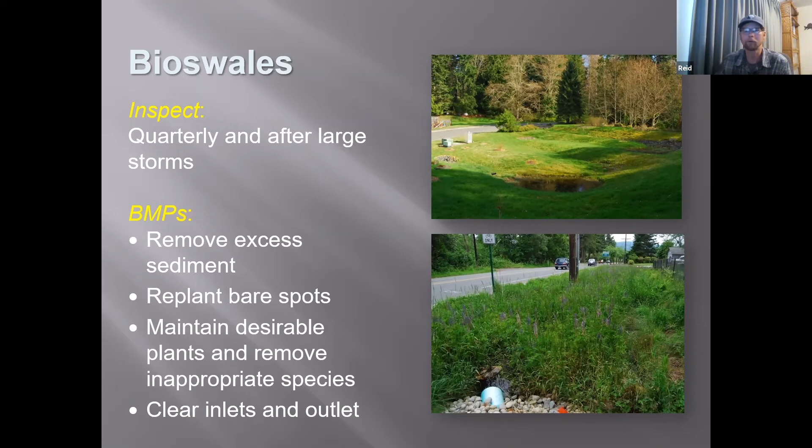And bioretention and rain gardens have a lot of the same maintenance considerations as a bioswale, just checking for trash, making sure you've got the desirable native species and not having any invasive species or large trees growing where you don't want them. On rain gardens, they usually have curb cuts and sometimes there's a drainage outlet pipe, depending on their design. And those are areas to watch for sediment buildup, clear that out so that the water can flow.

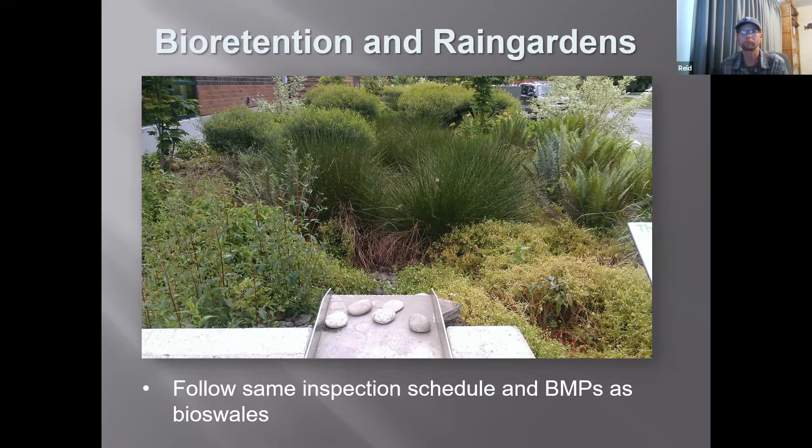Access control, just maintaining your fences, removing any poisonous plants. Blackberries are a common issue for access in these stormwater ponds. They just tend to grow over the berm, and then you can't inspect the berm anymore or gain access to the control structure without cutting down all your blackberries. So it's good to stay on top of that.

And then also, a lot of times these ponds are in people's backyards. So you tend to see people dumping yard waste over the fence, and we don't want that yard waste becoming sediment in the bottom of the pond that you then have to remove. So talk to your neighbors and keep an eye out for that blackberry creeping in.

Talk a little more about invasive vegetation. Some of the biggest problems that I see is the blackberry, but also we have knotweed, which can really cause some erosion issues in the way it grows. And then English ivy just crowds things out, and it's best to go after these things in the spring, early summer, before they go to seed.

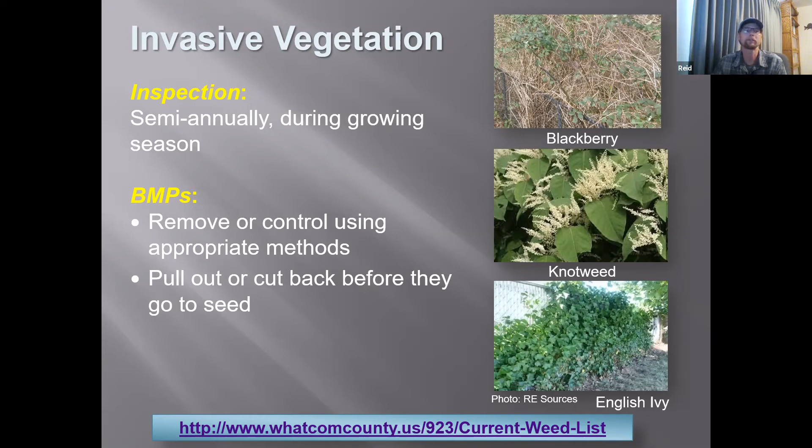You can usually control all these pretty well just by pulling out small plants before they get larger, and manually removing blackberries and other problem plants with weed whackers and chainsaws. Let's see, at the bottom there, I have a link to a current weed list for Whatcom County, and that'd be relevant for what you find in Skagit as well. An inspection on invasive vegetation semi-annually and during the growing season. Right.

After the control structure, your stormwater is leaving your site and moving on to sometimes a ditch, but a lot of times directly right into a stream. So you want to make sure, even though usually this might not even be on your property, it's a good place to go out to the road or find out where that discharge is and make sure that it's properly rocked and you don't have erosion in that area. And if you're seeing sediment there, that means it's coming out of your facility. So you'll want to determine why sediment's not being trapped further up the system.

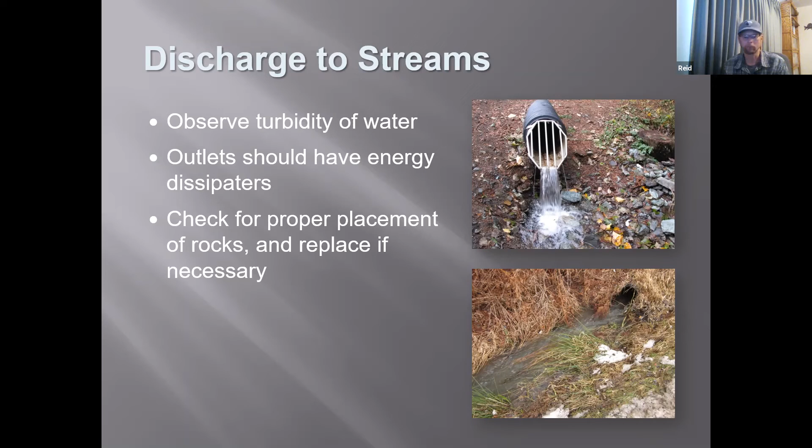And if you don't know where your discharge goes, it'd be a good thing to think about that and share that with your neighbors so that you all have that connection of what your pond flows to, what stream, and then to the Skagit or ultimately to the Puget Sound. So it's always good to keep that connectivity in mind and why we want to have the best water that we can leaving our systems. Don't want that kind of thing going on.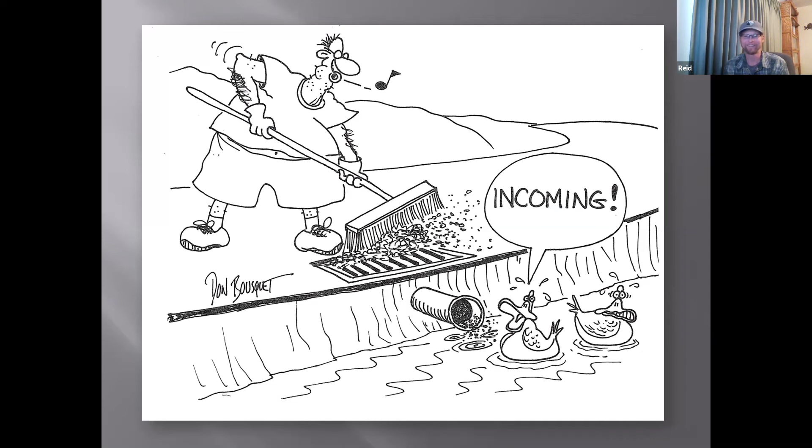So I know Christy will give you guys some good advice on some ways to get involved, but there is a lot that can be done within your neighborhood, just amongst your neighbors, without bringing in the professionals. So grass cutting and brush clearing, trash rack clearing, cattail and brush removal, garbage cleanups, fence and signage upkeep, cleaning the catch basin grates, like when you're out walking the dog, observing those seasonal pond conditions.

That's a big one. Catching that early is important to prevent erosion. Your pond's designed to be at a certain level. So when it is at an elevated level for an extended amount of time, that can lead to erosion around the pond in places you don't want.

Control access and unauthorized uses, preventing dumping of yard waste, keeping leaves and bark out of the street, requesting street sweeping and catch basin cleaning if you notice it's needed, and also watching out for runoff from construction piles in your neighborhood.

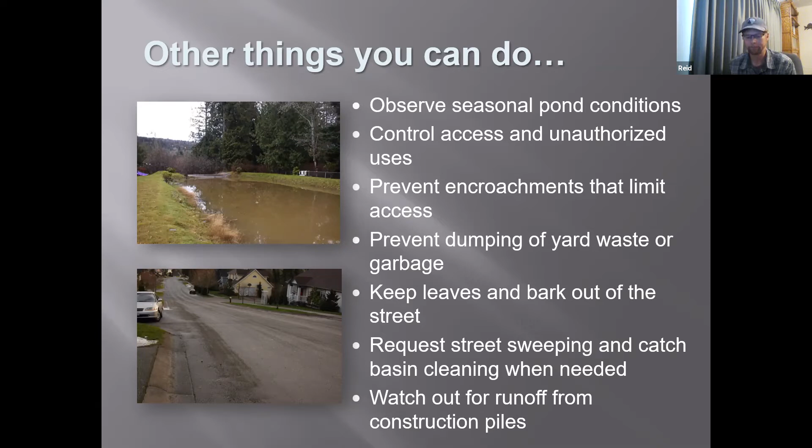Some of the safety concerns: you've got the confined spaces we discussed, steep and slippery slopes, insects and poisonous plants, lifting and exertion, and proper use of any heavy equipment or power equipment you might have to use.

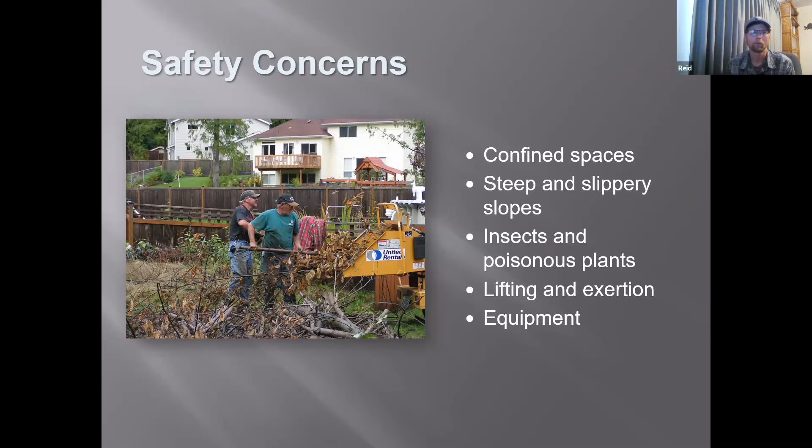What should professionals do? Well, the vault inspections and cleaning should be done, especially with the confined spaces, by professionals. Any pesticide application, large vegetation removal, sediment removal, any structural or plumbing repairs. And if you're interested in providing some habitat and having a nice aesthetically looking pond, then it might be a good thing to ask a professional to help pick out the right plants and design a planting program.

So your liabilities: there's personal injury on the property, damage to public or private property if you had a berm failure or something of that nature, and then regulatory as far as proper maintenance, allowing you to have good water quality and not affecting habitat.

For record keeping, typically you're going to want to have some kind of a report annually, depending on your requirements where you live. And so take photos of anything you see, report any problems to managers, and keep everything in a file.

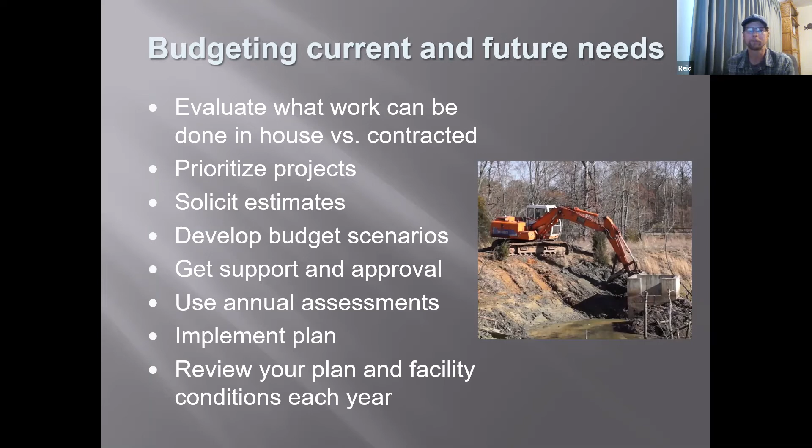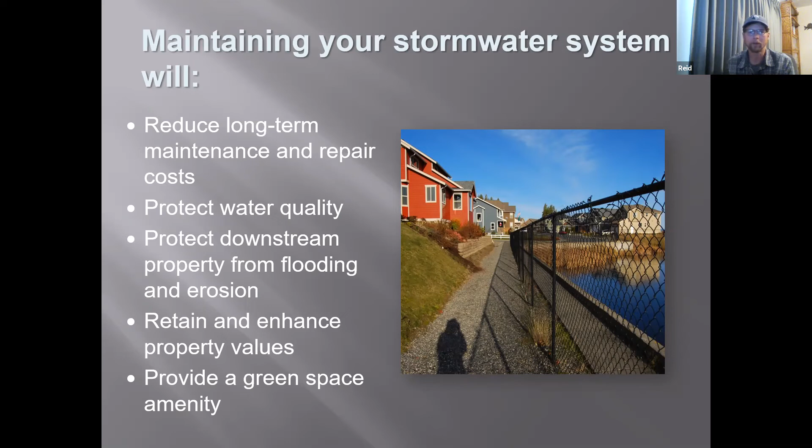So by now we all know that maintaining our system is going to help us save money over the long run. And we're also going to protect water quality and protect downstream property from flooding and erosion. A nice stormwater pond can retain and enhance your property value, make your neighborhood a nice, aesthetically pleasing area, and provide a green space amenity. So there is some potential there to make some improvements to your neighborhood. Maybe the pond is something that's not even accessible, but could be a nice, fun place for the community to gather and watch nature.

So if you guys have any questions, I'm happy to take them along with our other presenters. I'm going to check in with Christy. Do you want to get going on yours before we do questions, Christy, or shall we take a round? Oh, well, maybe I should go through it, then we can just focus on questions. How's that? That sounds good. Okay. So I guess I can.

Okay. So I'm just going to do a little wrap up and then we'll get to questions. I'm sure some of you still have questions about maintaining your pond. And I would just like to emphasize again what Reid mentioned about the importance of keeping records, documenting photos and observing your detention pond. And if you're in an HOA, getting your neighbors involved and maybe inspired to help take care of that detention pond and help with maintenance, it can be a great neighborhood experience, and fun if you can share the work and work together in keeping things in good order for you.

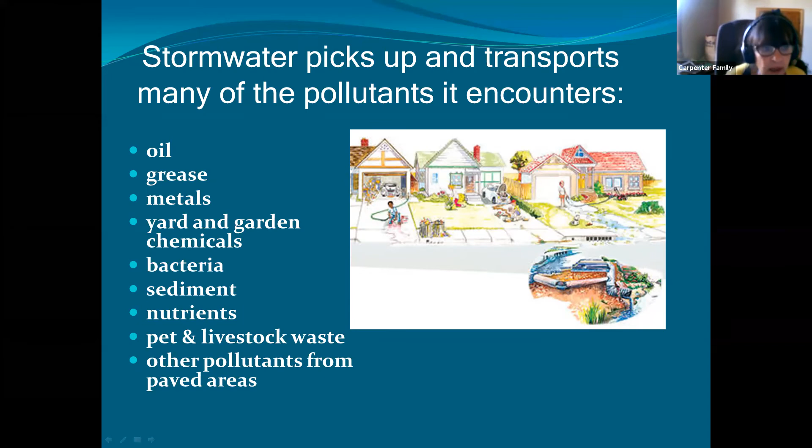So when it rains, the rainwater or snow melt or even a sprinkler, the water will pick up and transport any of the pollutants it encounters. And of course, on our streets and sidewalks and our yards, there's a variety of different things that water can pick up and carry into that detention pond, like oil and grease and metals from our cars, yard and garden chemicals, bacteria, sediment, nutrients, pet and livestock waste, and other pollutants that can be on paved areas. So where does your stormwater go?

The majority of our community, the runoff that leaves our homes and our neighborhoods runs directly into a local stream eventually. So it goes through the storm drain, and if you're in an HOA neighborhood, into your detention pond facility, and then out to a drainage ditch or creek that will flow eventually out into one of our marine waters. It does not go to the waste treatment plant.

You can see on this pipe system here that carries everything from our house, that's inside our house, our wastewater from our toilets and sinks and showers, that goes to the waste treatment plant. But the majority of our community, as far as the runoff from our property, it does not get treated.

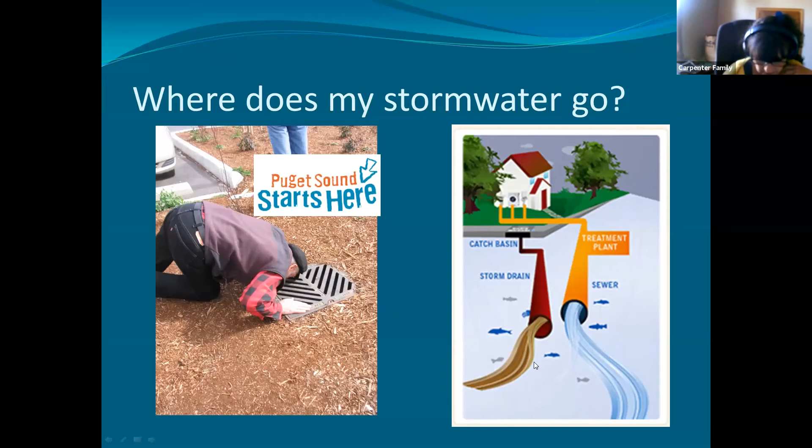So the way we landscape and what we do in our own backyard affects water quality and habitat in our streams, rivers, and marine waters, and can cause shellfish closures and downgrades, swimming closures. So we don't have all the recreational uses that we love so much and what we cherish and value in our community.

So here's just some ideas that you can do to help reduce stormwater runoff. And if you can share this information in your neighborhoods and get everybody on board, that is excellent. So never dump anything down a storm drain or in ditches. This actually is a common problem.

People will dump oil or paint or different things and they just think it disappears or maybe goes to the waste treatment plant. But as mentioned, these storm drains on your corners of your neighborhood, it's not treated and it goes eventually directly to a stream or river. So you don't want to dump anything down there, just spraying down the drain.

Checking your car for leaking fluids and recycling motor oil if you change it yourself. And don't litter. Pick up trash you see on the ground. And that's another fun way you can get the children and youth in your neighborhood involved as well.

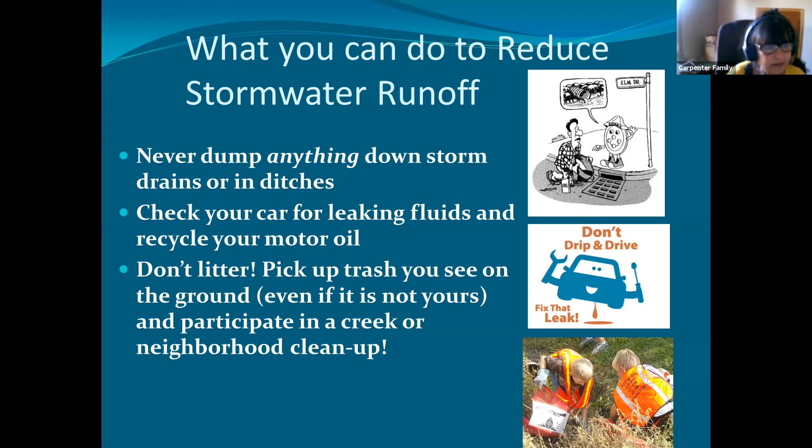Picking up after our pets. The estimated daily production of dog waste in our county is over 6,135 pounds per day. So while one dog may not be the problem, it's cumulative impacts of all of us with our pets that we love so dearly. So the solution is fairly simple. Pick it up, scoop it, bag it, and put it in the trash.

And another little tip, instead of hosing down our driveways and sidewalks, is to get the broom out and sweep, so we're not adding extra pollutants down the storm drains and into that detention pond. Directing our downspouts and gutters into our lawn and plant beds or into a rain barrel, those are kind of fun to have, cisterns or a contained area.

Reducing our use of fertilizers, pesticides, and herbicides. I don't use any of those things in my yard anymore and have relied on just using compost and mulch in the garden. And I might say my flower beds are quite lovely. So I've been gardening for pollinators. It's been a lot of fun.

Reducing the size of your lawn, adding more trees, shrubs, and plants, and consider incorporating some native plants. So not only does it reduce the use of having to use chemicals, but the plants also help absorb runoff, and so we can also replenish our groundwater, which sometimes when we have a lot of impervious surfaces, isn't getting recharged. So there's a lot of great benefits to that.

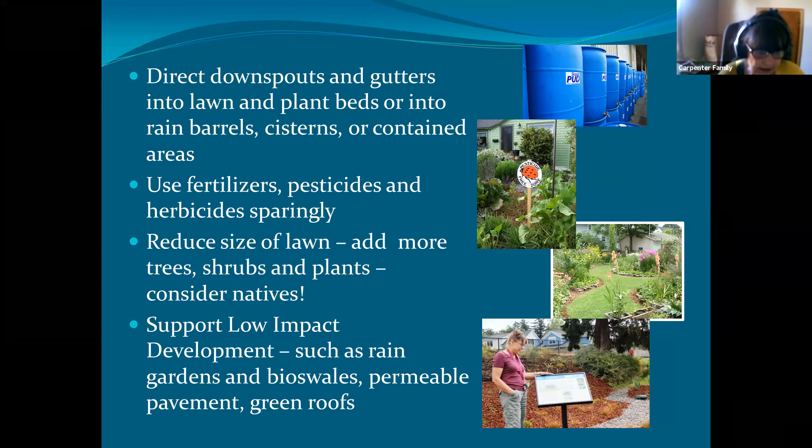So these are ways we can help reduce the amount of runoff and reduce impacts to our waters, keep it clean and healthy. So here's a few fun pictures of, these are all in Skagit County, of neighbors who have incorporated more plants in their landscape.

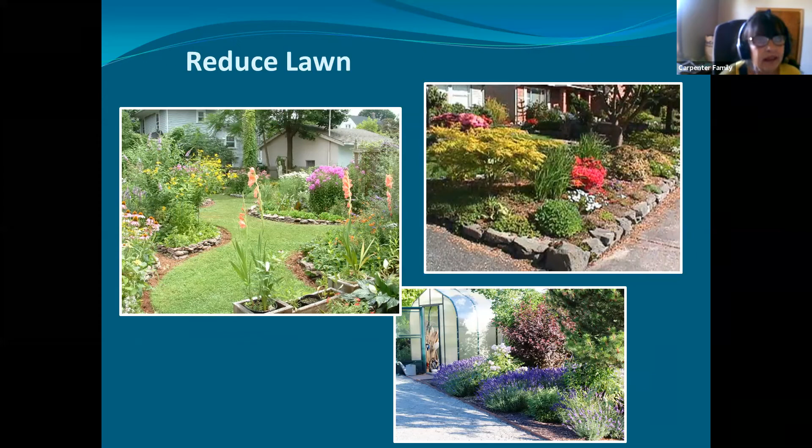And here's just a few pictures, these are local as well. The Bayview United Methodist Church put in a beautiful rain garden a few years back and a hedgerow, got rid of all the blackberries and planted a native plant hedgerow in the rain garden. And then using rain barrels so you can use that water to water in the summer. And this is a friend of mine in Anacortes. Having a big system like this is ideal if you can.

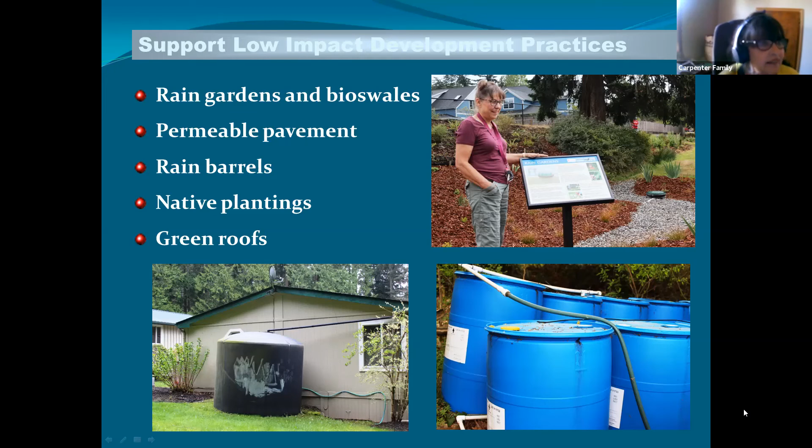So there's a lot of good reasons to garden sustainably. Our population continues to grow, and as we continue to grow, it puts more pressure on our soils, our water, our forests, and our other natural resources in our community. So we can help offset that by gardening and how we garden and take care of our own backyards.

And unfortunately, prevention is the best way, because it becomes very difficult, very expensive, and sometimes even impossible to duplicate those natural services once they've been destroyed. So protection is the way to go if we can.

And then just to throw out there, because this has happened in a lot of areas, people empty their aquariums into a stormwater detention pond or a lake. And the milfoil that's usually in most aquariums is a very bad thing to have in our local waters. It grows really quickly and it blocks sunlight. It draws mosquitoes, and it also kills off some of the native aquatic plants that we want in our water.

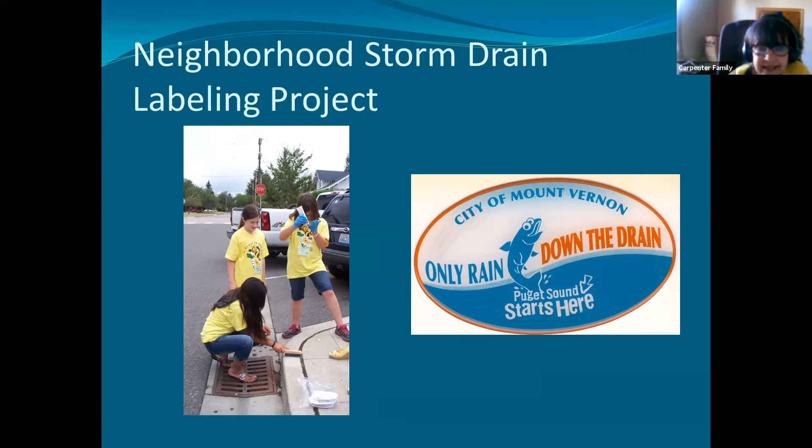And I just want to thank all of you for being here tonight. And we're happy to take more questions. We hope we gave you some resources and information that you'll find helpful. I know it's a big chore taking care of those detention ponds.

And David Roberts, who is on here, has a story too of his neighborhood that he moved into, and all the problems they had, and how they were able to get their neighborhood involved in addressing the problems with their pond. So he's a good resource as well. So with that, I'll turn it over to questions.